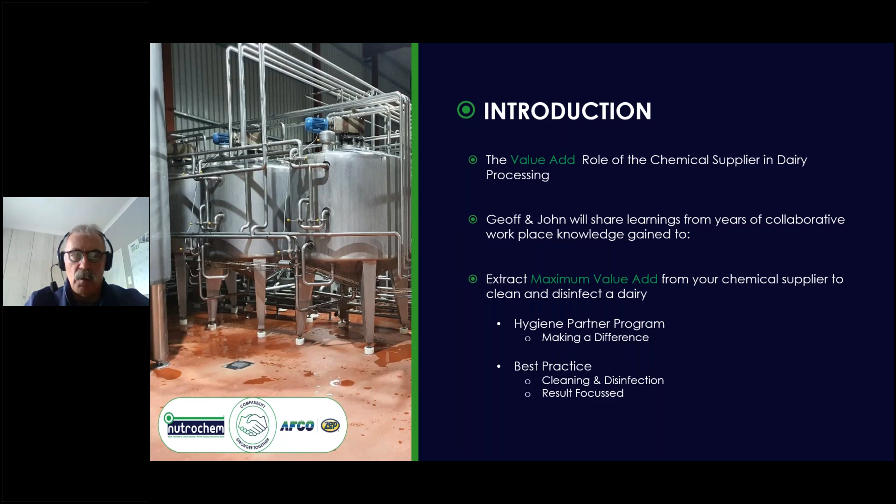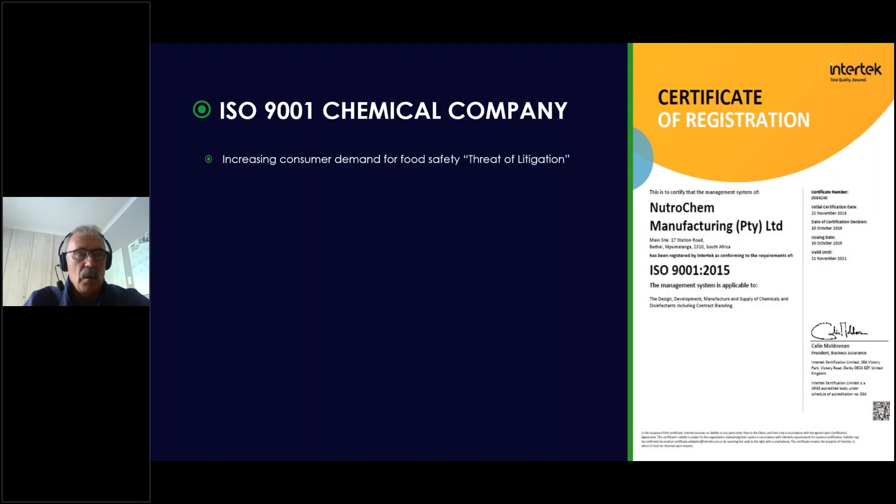Importance of being a 9001 certified manufacturer. Increasing consumer demand for food safety, threat of litigation - we've all been subjected to the listeria outbreak that existed and all the costs related to that many of our large manufacturers incurred. Food processing facilities require the peace of mind that the risk related to food processing is managed well by your supplier. Your hygiene product should be certified and approved.

Suppliers must consistently produce products that will meet customer quality and performance requirements. A QMS system that allows for traceability and accountability should there be any requirement to backtrack any particular issue that may occur within the cleaning and disinfection process.

Further, the role of the chemical supplier must be a hygiene partner that can collaborate with a customer to set global benchmarks and strive for continuous improvement. Manage product performance to achieve hygiene chemical outcomes aligned to industry-specific food safety requirements, with a continuous improvement culture and an outcome-driven focus on best practice hygiene standards, and process-ready surfaces to focus on producing safe food with a good extended shelf life and low cost to clean.

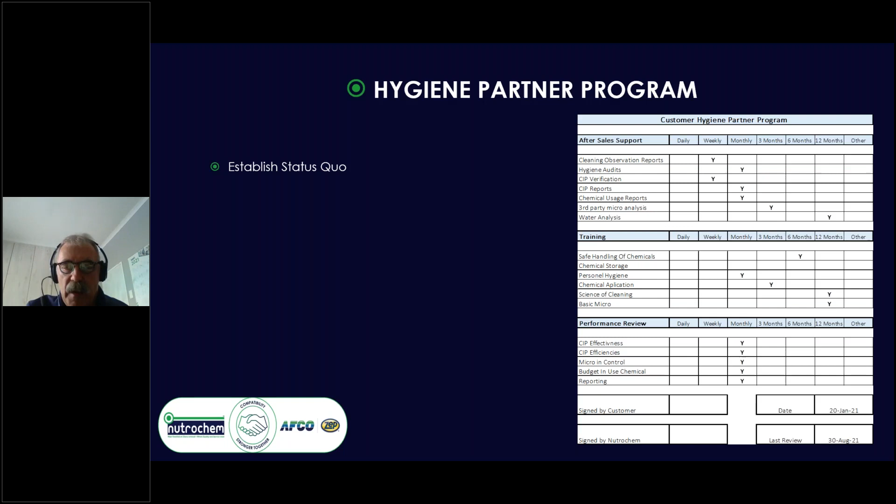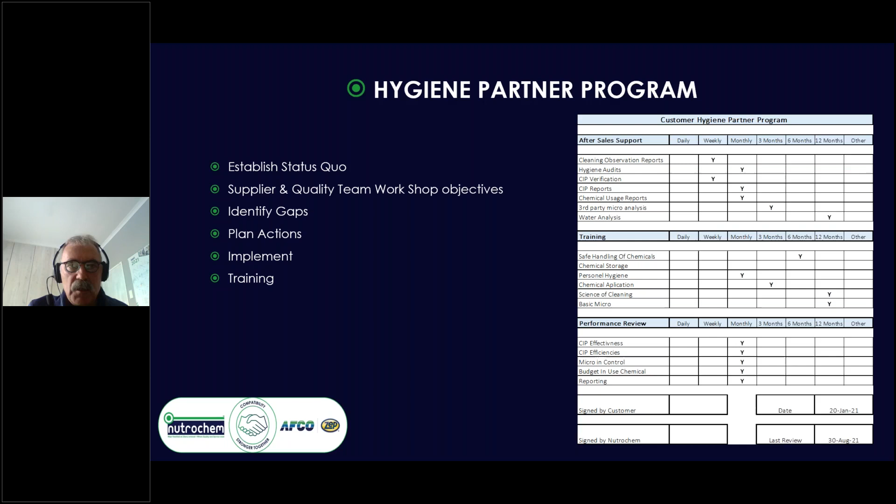Typically, when we engage with a customer, we would establish the current status quo. If you can see this document on the right-hand side, it allows us to outline all aspects of the hygiene partner relationship, set the criteria for how one wants to manage that process, establish the current status quo, identify the gaps, plan actions to close those gaps, implement the changes, train people to ensure those changes remain at the standard they should be, and then monitor and evaluate.

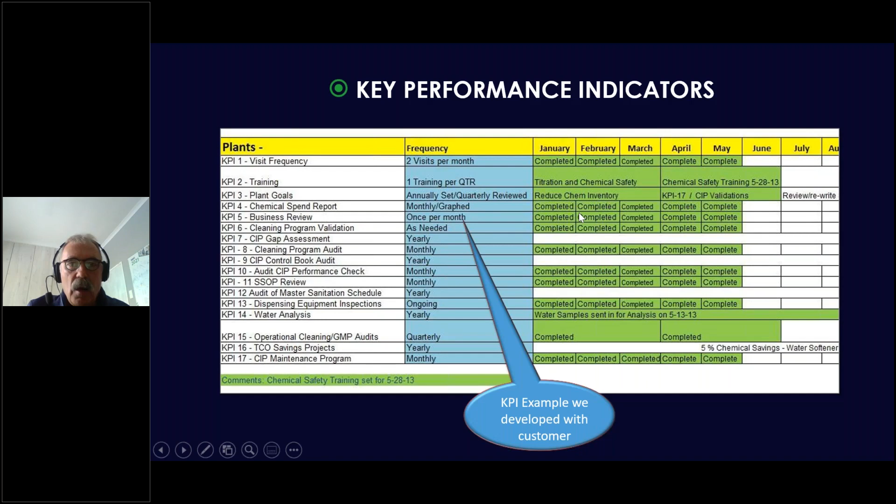Apologies, just going back - this is another document that allows for project management. It illustrates that all projects set are completed by certain due dates between the two entities, both the customer and the supplier.

Managing CIP regimes, our focus is always on an effective CIP regime that is efficient, using customized tools to monitor and evaluate CIP performance. Our in-use cost is all important. Energy and water are all important.

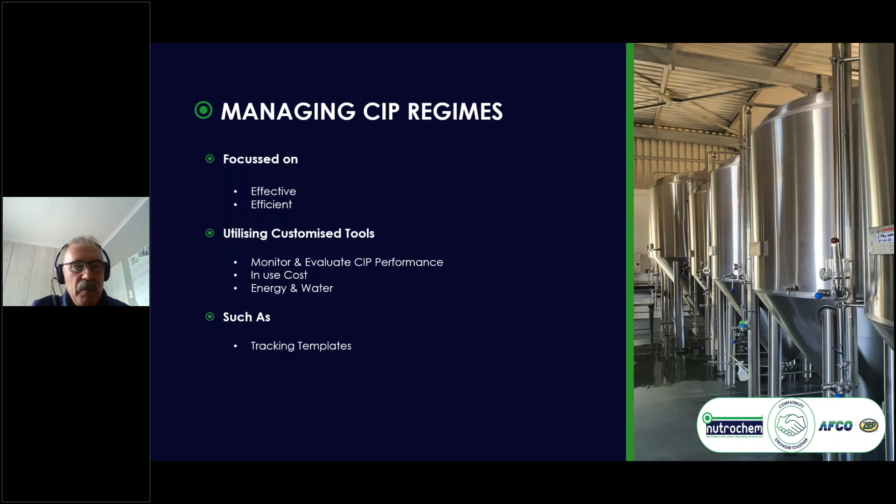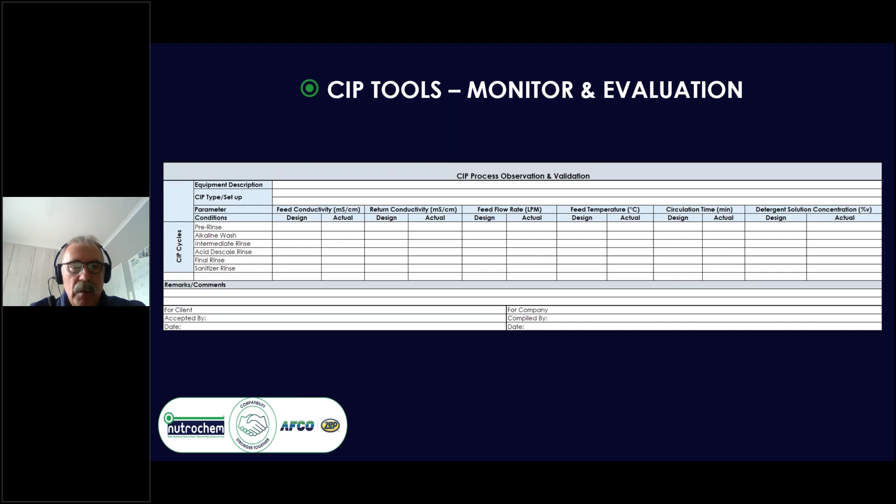Tools that we have as an example would be a tracking template, and a new technology known as verification in place, which allows one to evaluate proof of cleans. This is a document typically that we would put in place to monitor cleaning and effectiveness of the clean, along with all aspects of CIP parameters. This document can be customized depending on each entity we may be working with, to suit your needs and achieve a common goal as an outcome.

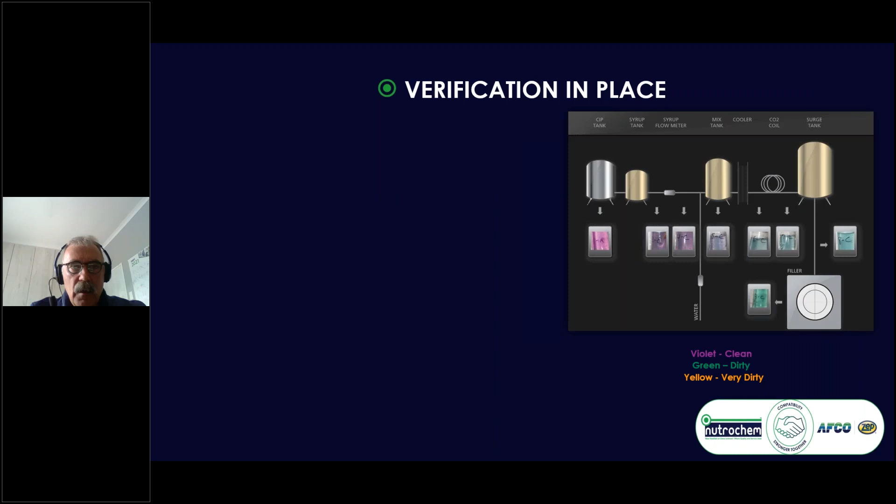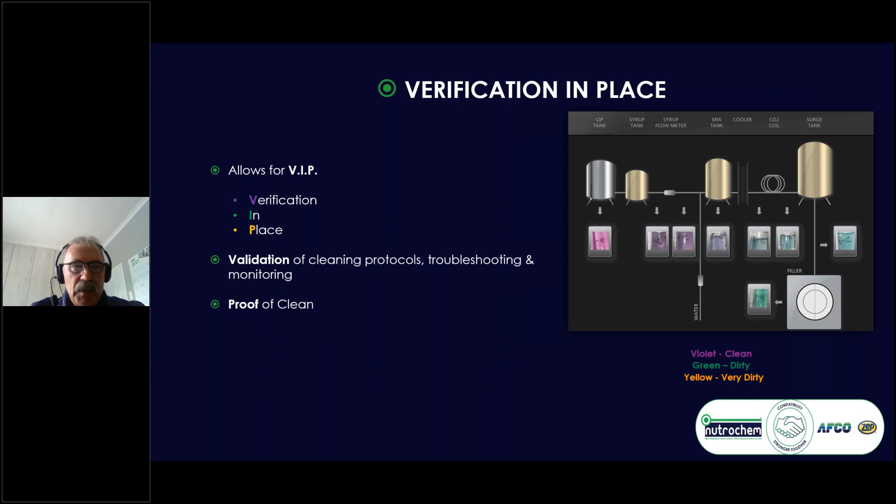Another tool that we have right now is known as smart technology. It allows for verification in place, which is a validation of cleaning protocols and troubleshooting monitoring, and it's designed to give you proof of clean. John, my colleague, will explain a little bit more about this in detail as he presents the technical side of the customer hygiene program.

Further to that, the role of the chemical supplier should have technology available that is aligned to global trends, reduces demand on energy and water, allows for optimized CIPs, and gives you access to an international knowledge pool, with application methodology that applies best to your needs. It should have an environmentally conscious focus, lead the way in sustainable raw material selection, and product raw material exclusions such as formaldehyde and NP9s for bioaccumulation potential risks.

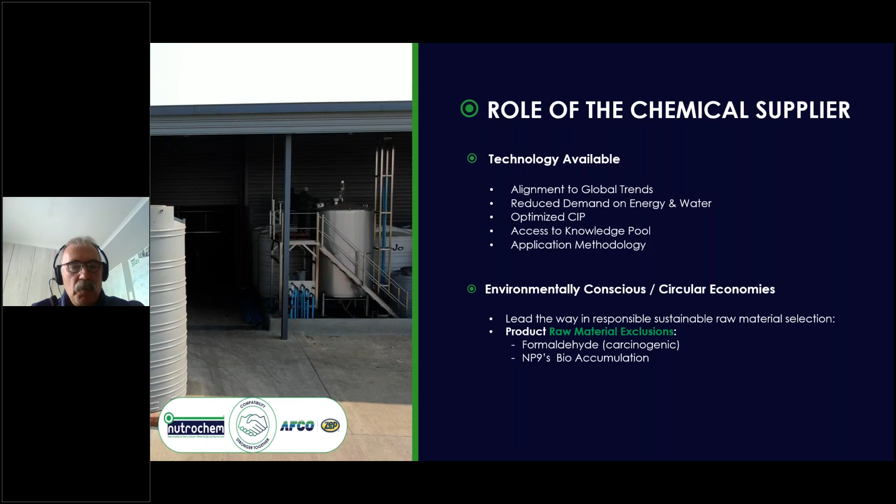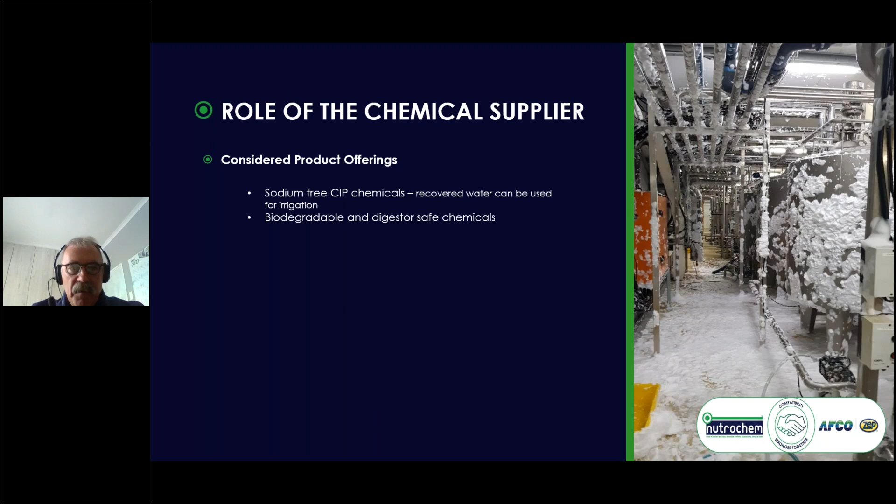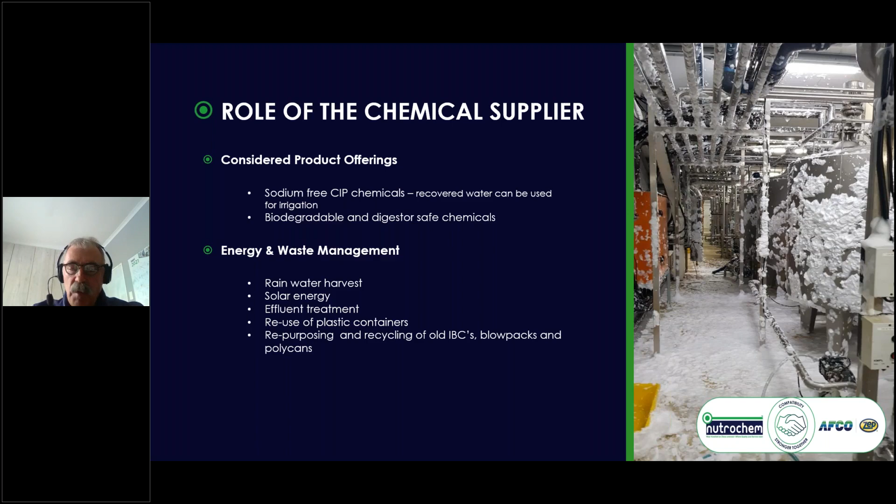In addition, considered product offerings should be sodium-free, aligned for recovered water that could be used for irrigation of farmlands, etc. Biodegradable and digester-safe chemicals, energy and waste management, potentially harvesting rainwater for the production of chemicals, solar energy to reduce your footprint, effluent treatment, reuse of plastic containers where possible, and repurposing and recycling of old IBCs, blowpacks, and polycans, things of packaging of that nature.

At this point in time, I'm going to be handing over to my colleague all the way from Australia. John, welcome. Thank you very much, Jeff. Good morning everybody, my name is John Cornford, and I'll talk about some of the technical aspects of cleaning and disinfection.

I'd like to start this off by talking about some definitions. I'll just wait while the link from Australia to South Africa works. Just hold on a moment. I'm having a small problem with the slide management. Excuse me for one moment while I bring this back under control.

If we start off by talking about some definitions, we'll start with definitions about cleaning. Cleaning is the complete removal of residues and soil from surfaces using water, detergent, or enzymatic products, leaving them visually clean so that subsequent disinfection treatment can be effective. You cannot disinfect dirty surfaces. Physically clean means visually clean to a satisfactory standard. Dry surfaces and strong light sources make a big difference to seeing what is visually clean. I use 150 watt LED panels instead of torches to look at tanks, and the results are startling as many otherwise unseen imperfections become visible.

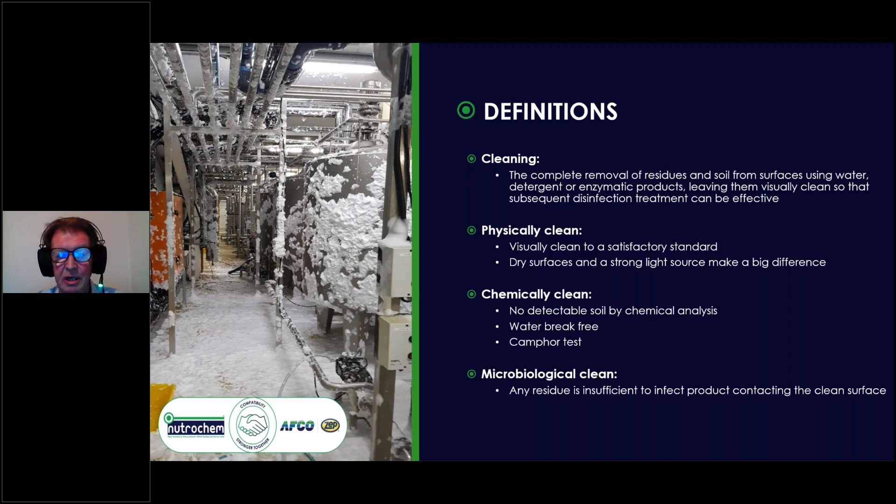Chemically clean can be defined in various ways: that there's no detectable soil by chemical analysis, that there's a water break-free surface, meaning water does not bead on the surface, indicating the presence of residues, or something called the camphor test. The camphor test is a very sensitive test for oily residues, particularly useful when validating the cleanliness of newly installed tanks. The last one is microbiologically clean, meaning any residues are insufficient to infect product contacting the clean surface. If we move on to a second set of definitions related to disinfection.

Disinfectant is a product used for its ability to kill specific microorganisms, meeting specific standards of log reduction under specific conditions. Chemical products falling into this category are highly regulated and covered by a range of standards, including testing under soiled and unsoiled conditions, testing in hard and soft water, etc. Disinfectants are typically used in a two-step process of cleaning followed by disinfection.

They're clearly defined and codified around the world and recognized as high-level activity materials. The South African standard for disinfection, SANS 54885, is aligned to the European standard, EN 13697, so there's an alignment of standards. South Africa further classifies disinfectants according to meeting various standards for killing different microorganisms in different physiological states.

The second definition is about sanitizer. Sanitizer is a term associated with disinfection, but it's got vastly different meanings around the world. In South Africa, I understand it's generally used to describe personal hygiene products such as hand sanitizers. In the US, the EPA defines sanitizers as products which must kill 99.9% of bacteria, or a log-3 kill, on surfaces within 2 hours of exposure, but not viruses. Clearly, such a product is not very useful to us for disinfecting food contact surfaces.

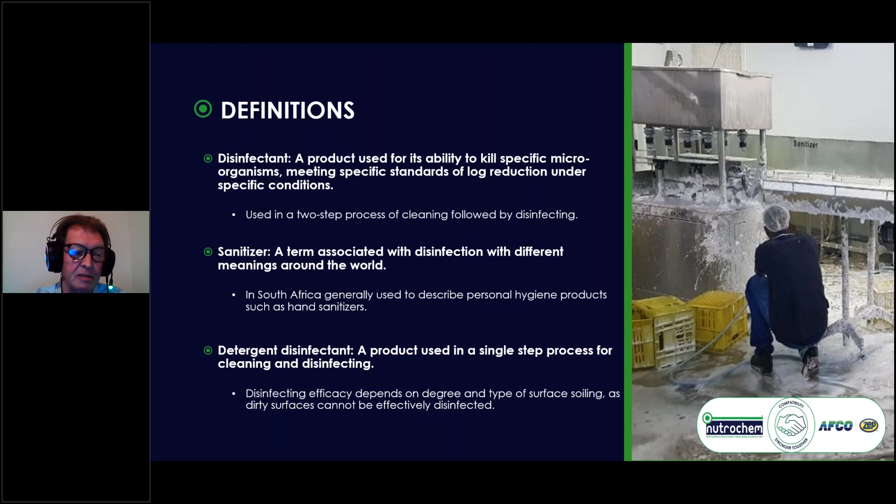If we move on to definitions about some applications, and talk about firstly CIP. So CIP means cleaning in place, and it's cleaning and disinfecting processing plant interior surfaces without the need to dismantle, including vessels and pipe work and valves and heat exchangers and centrifuges and filler interiors and so on. COP is cleaning out of place, which traditionally involves stripping plant to its component pieces and placing them in a tank of detergent, which is circulated to provide mechanical action. This has been largely superseded by CIP.

Disinfectant, soak, and storage tanks still fit into this category, and they're used to disinfect parts after cleaning and store them in process-ready condition until they're next required, and that's still quite common.

OPC means open plant cleaning, and it's a process for cleaning and disinfecting exterior surfaces by spray, foam, or manual cleaning. Sometimes the application is done by an operator and sometimes by fixed automatic systems. EFC, the last one, is exterior filler cleaning, and it's a subset of OPC, usually specific to rotary fillers, and it generally involves a fixed jetting system and an automated cleaning program.

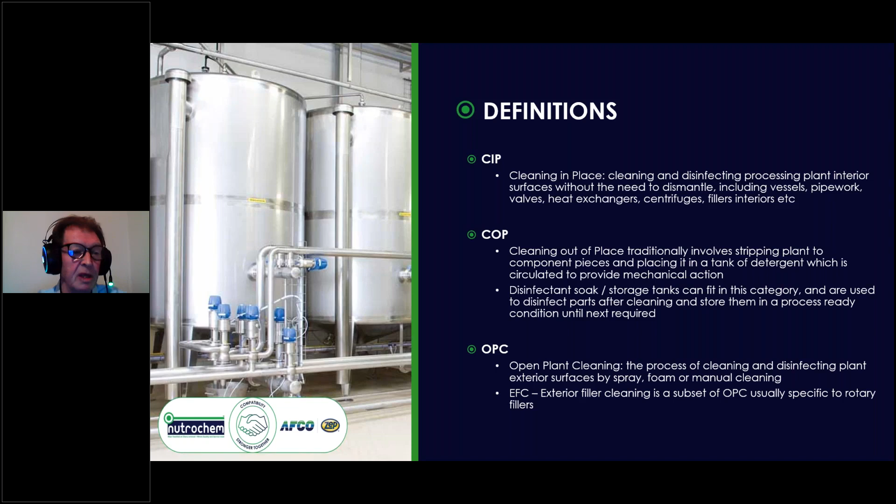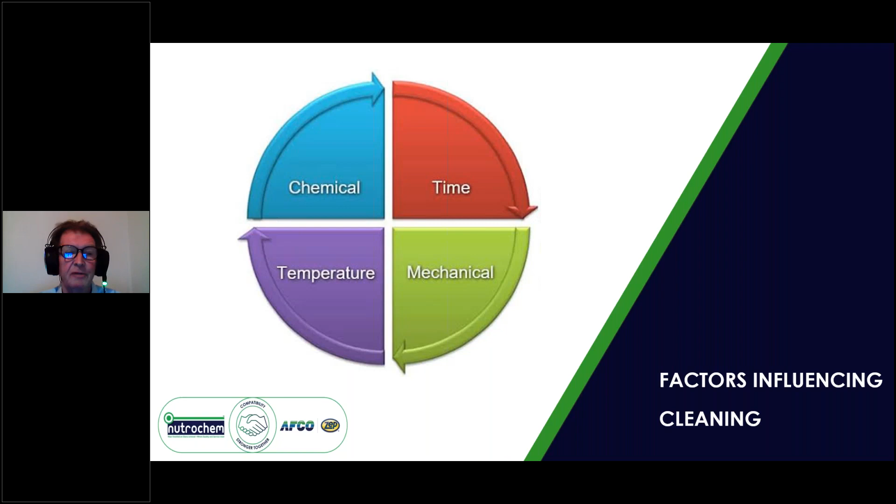We talk for a moment about factors influencing cleaning, and the graphic here shows you something that's called Sinner's circle, and it shows that the four key factors for cleaning are chemical, time, mechanical action, and temperature.

Effective cleaning relies on three energy sources: mechanical energy, chemical energy, and thermal energy, and applying them for a period of time. If we think about mechanical energy being applied in various different ways: the scrubbing action of a brush or cleaning pad in manual cleaning, or the scrubbing action of high velocity turbulent flow conditions in a CIP pipe cleaning, or the scrubbing action of falling liquid films in a low pressure vessel cleaning scenario.

Chemical energy for cleaning takes many forms depending on the soil matrix and the chemistry applied, and the water condition as well. Amongst others, we consider simple dissolution, where an acidic detergent would dissolve a scale, for instance, saponification of fats and oils, where strongly alkaline products act on something like milk soils, surface tension reduction by wetting agents, allowing cleaning agents to penetrate soils, to emulsify oily soils and to reduce the foaming tendency of foam generating soils, things like proteins. Thermal energy is pretty straightforward.

The rule of thumb is that chemical reaction rates double for every 10 degree C rise in temperature. However, thermal energy usage and cost can contribute significantly to the overall cost of cleaning, so people are generally tending to reduce temperature, not increase it.

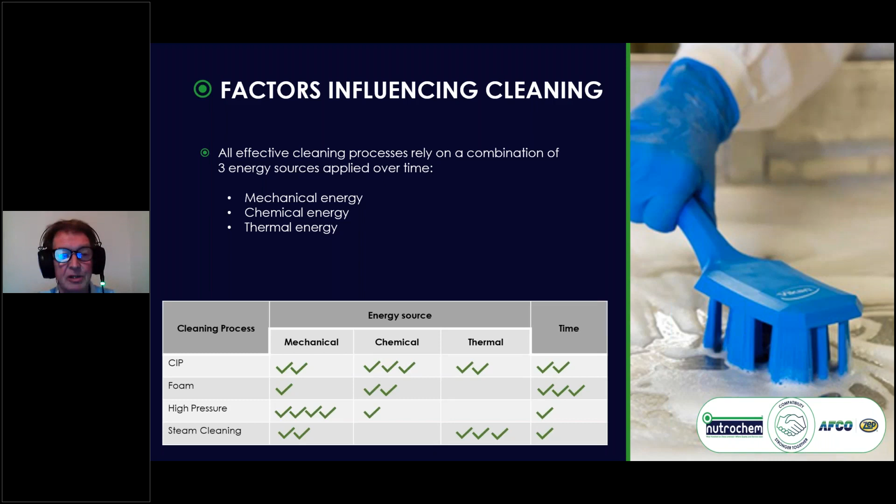Different applications rely on different balances of these energies and on applying them for different times. If you look at the graphic, it shows on the left-hand side various different processes, then something about the energy sources, and with some ticks something about the amount applied and the time they're applied for.

If we talk for a moment about chemical supplier instructions, there are many instructions required of suppliers: product composition and efficacy information, safe storage and usage of products information.

The collaboration and development of standard operating procedures is one of the most important things. All cleaning and disinfecting processes must be covered by detailed SOPs, standard operating procedures, and they should be developed by the user and the supplier, because the supplier knows about the chemistry he wants to apply and the best conditions for doing it.

These should cover the object being cleaned, the frequency of cleaning, and the maximum period from empty to clean. You don't want tanks to sit empty and allow soils to dry out - they become much more difficult to clean. So it needs to be specified.

The frequency of disinfection, including during periods of plant inactivity. So if you clean and disinfect a tank and it's not used for 72 hours, should you be disinfecting it again before using it? There should be a standard.

Requirements in preparation for cleaning, detailed program cleaning, including for each step the temperatures, the times, the chemical products and concentrations, including sampling and testing regimes, flow rates if applicable, pressures if applicable, and rinse step terminators, which could be something like pH or colorimetric tests.

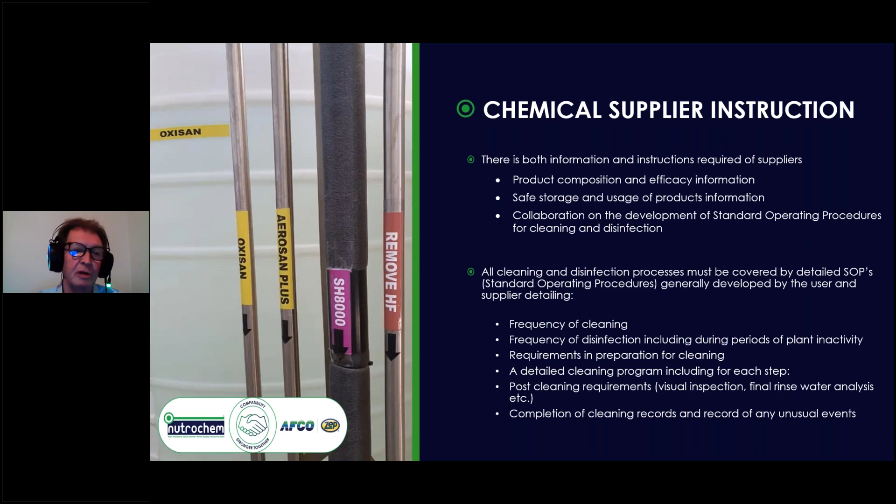Then post-cleaning requirements - it might be about visual inspection, final rinse water analysis, whatever it might be, but there are things that need to be done after the cleaning to validate it. And lastly, the completion of cleaning records and the logging of any unusual events.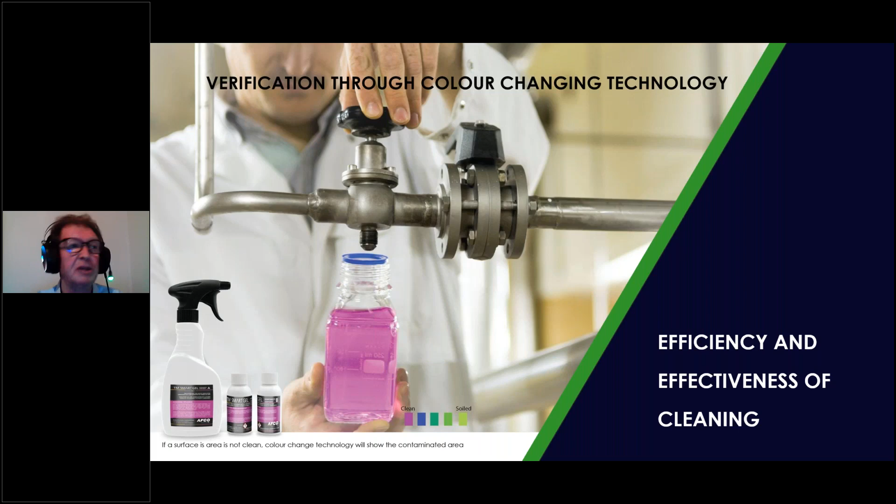We'll talk for a minute about CIP management and efficiency and effectiveness of cleaning. CIP can be classified as effective and efficient. Effective means that after CIP operations, the plant is clean, it meets the required microbiological standards, and it's process ready. Efficient means that the plant is clean and process ready at a reasonable cost, including utilities such as water, heat energy, effluent chemistry, and production downtime.

The key factors that impact on effective CIP are the correct programs, usually combining pre-rinse, detergent wash, post-rinse, disinfection, and a final rinse step if applicable. The correct flow rates and pressures for the plant items being cleaned, necessary to create the correct amount of mechanical action - this is absolutely critical and is often overlooked and missed.

The flow rates for pipes are relative to the pipe diameter, creating flow velocities in excess of 1.5 meters per second, probably with a maximum of maybe 3. For vessels with low pressure spray devices like spray balls, the flow rates are relative to the vessel's circumference and to some extent its height and the soil load.

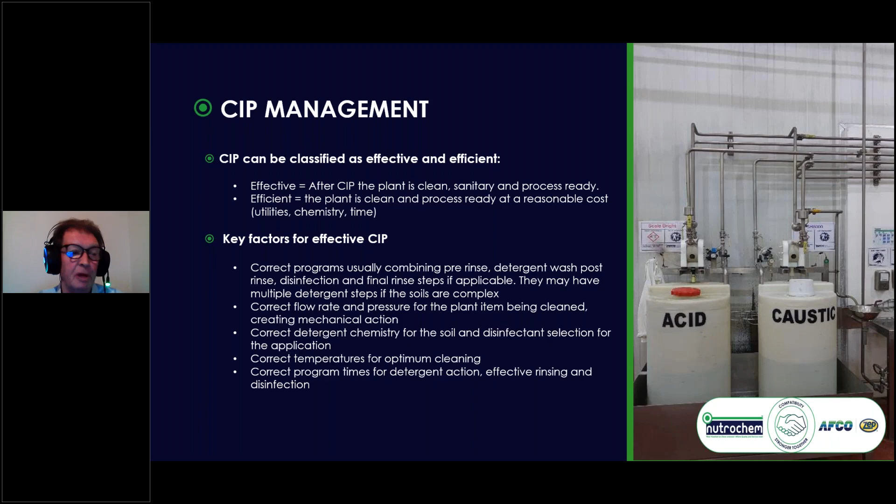The correct detergent chemistry is important, and the correct selection of disinfectant for the application. The correct temperature for optimum cleaning, and the correct program times for detergent action, effective rinsing and disinfection. So those are the things for effective CIP.

If we talk about efficient CIP for a moment, this is about minimizing the losses of chemistry, water, and thermal energy. In a typical world, minimizing these losses reduces CIP time, and so it also reduces production downtime. Assuming that hot CIP temperatures have been optimized, most losses occur during CIP phase changes.

This is when you're changing, say, from rinse water to detergent or detergent back to rinse water, etc. Creating specific steps in the CIP program to manage these interfaces is critical. The objective is to create program steps that minimize the opportunity for different phases to mix by managing the interfaces into pipes where they're confined, not in vessels. These steps are employed each time there's a phase change, and they're special to each CIP circuit, each CIP object.

The efficiency is measured by comparing the detergent lost during the CIP process to the detergent quantity in the CIP circuit being cleaned, because detergent's easy to measure. So we find an easy way to do it.

Efficient CIP would be characterized by line CIP losses of, say, 6 to 10% of circuit volume. So if you had a CIP circuit where the volume was 1,000 liters, that'd be a medium-sized tank with its pipe work. If you were cleaning this 1,000-liter circuit at 2%, you would expect on a line to use 1.2 to 2 liters of concentrate detergent.

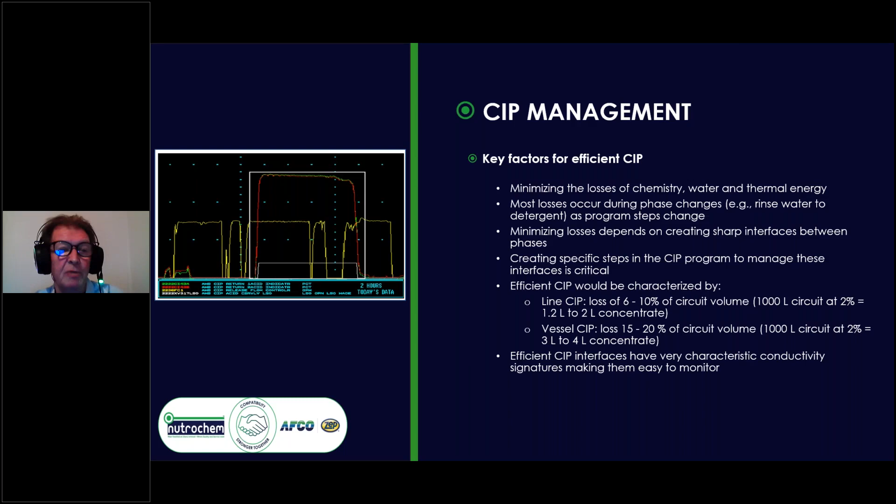Let's move on and talk about what happens when CIP all goes wrong. For ineffective CIP, so this is, I've done the CIP but things are still dirty, what are the actions? Check the CIP program operation with the original protocol. Has something changed? Did somebody bypass a step? What's going on?

Need to check that the operation of the CIP object for things like blockages, leaks, and malfunctions. Are the spray balls still in place? Are the spray balls blocked? Whatever it might be, are the valves opening correctly?

Need to check for changes in manufacturing protocol impacting on soils. Has somebody changed the way that processing is done, or the type of product that maybe flows down the pipes or flows through the tanks? It's changed, it's making everything difficult.

You need to check the times, temperatures, flow rates, concentrations, and so on. Check the instrumentation. With the best will in the world, instrumentation is calibrated regularly, but you very often see problems with instrumentation that mean the feedback values to CIP are incorrect and the CIP performs incorrectly. When you've done all of that, you usually have enough data to be able to resolve the issue.

The second one is about inefficient CIP actions. So if the CIP is much too expensive, what's going on? Again, firstly, you check the program operation with the original protocol, check the interface management steps, and any changes to the object configuration. The interface management steps are very critical to keeping the interfaces in pipes and not in tanks. If the pipe work has changed, the whole thing will be wrong.

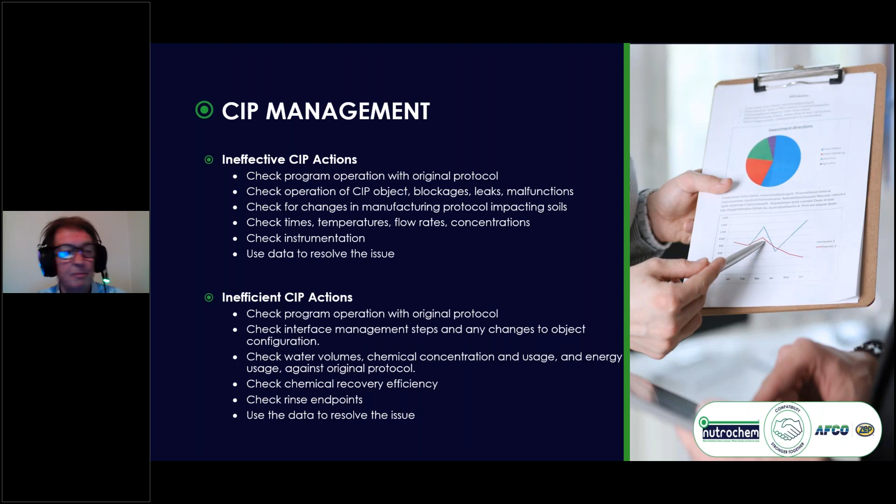Check water volumes, chemical concentration and usage, energy usage against the original protocol. Check the chemical recovery efficiency. Remember the 6% for pipes and the 15% odd for vessels. Check the rinse endpoints and use the data to resolve the issue.

If we talk for a moment about cleaning and disinfection validation, we talk about it first for CIP. The traditional validation methods are systems integrated into the CIP control system, where it's recording and comparing some key CIP parameters with a benchmark. The key parameters would usually be conductivity, flow rate, and temperature. If the values drift far enough away from the benchmark, it'll throw an alarm up and maybe stop the process or wait for somebody to take some action.

The second one is visual inspection. This is a little problematic as it breaks the post-disinfection security, but it's satisfactory if it's performed before the final disinfection process. After all, the tank should be clean, or the vessel should be clean, or the lines should be clean before disinfection.

Microbiological swabbing and ATP testing, and sampling of final rinsings from CIP cleans for microbiological testing if there's a final rinse. There are new colorimetric detergent technologies based on oxidation reduction chemistry with a color change from soil to clean during CIP, and these are becoming very useful.

When we talk about exterior cleaning and validation, it's traditional all the way. So traditional visual inspection techniques with strong light sources, traditional swabbing techniques, but now the use of dye technologies to clarify shadow areas where automatic cleaning systems aren't reaching, and the general cleanliness of automatically cleaned items on things like fillers.

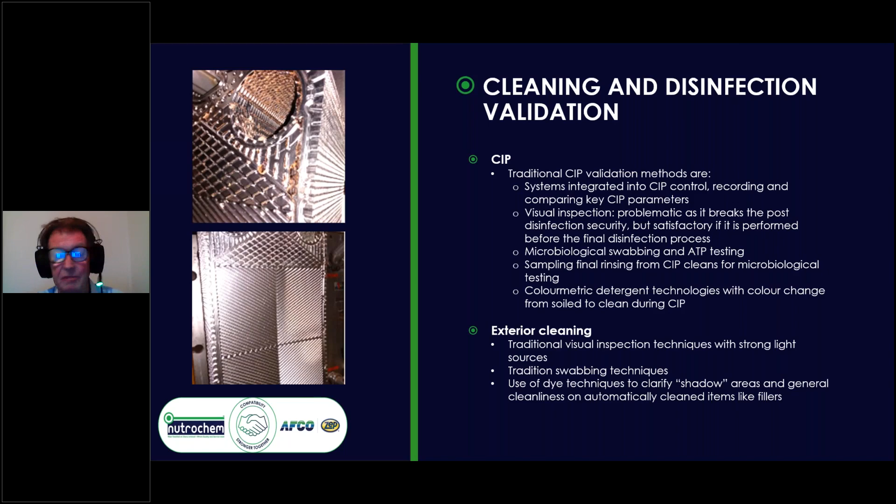Let's talk for a moment about the verification of rinse water usage. Every rinsing step must have a defined terminator that's not based on time. Time doesn't rinse anything. It may be applied for a time value or as a volume, but it should be based on a measurement critical to that process.

So rinsing occurs as pre-rinsing, which is prior to cleaning as a gross soil removal step. Post-rinsing after detergent steps to remove soil and detergent residues. And final rinsing generally after disinfection steps if it's done.

Pre-rinsing may use recovered water, and its endpoint is usually managed on time or volume, but it's based on measuring the level of soil in the outgoing pre-rinse water. You want to rinse away all the soil that you can. Good measures would be turbidity or color, or brix for sugary soils, or pH for acidic soils.

Post-rinsing is typically removing acid and alkaline detergent residues, and it's usually managed on conductivity. Conductivity is a poor indicator of concentration at low levels. It's very good at operating concentrations, but very bad for rinsing. Managing on time or volume based on pH is much more effective.

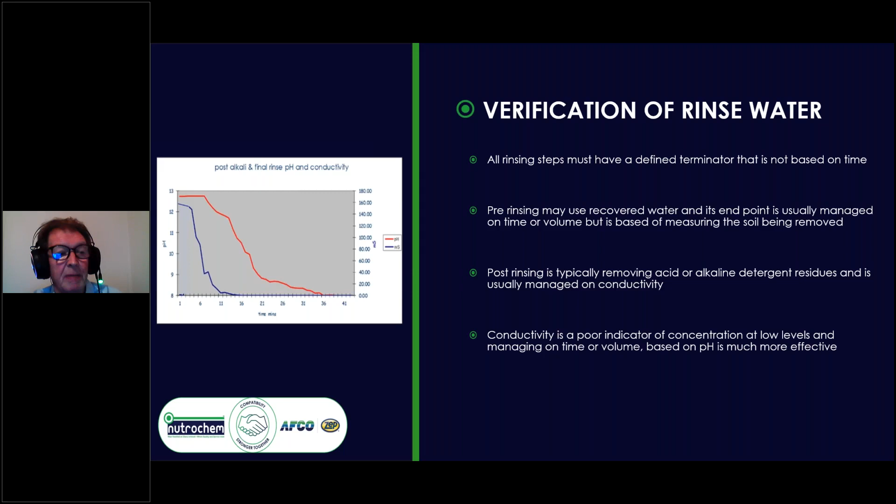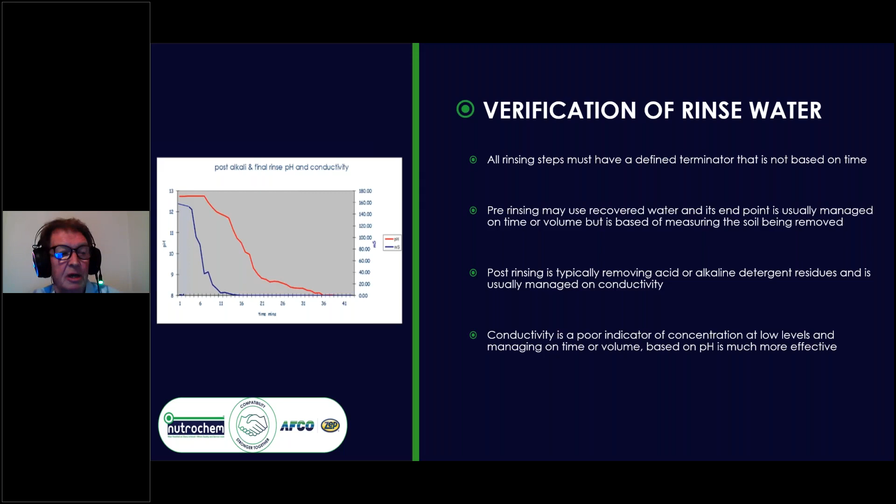Final rinsing specification is critical, as residues will contact product. Where final rinsing is required, it's often managed on conductivity, but it's better managed on pH or residual disinfectant concentration. Typically levels of less than 1% of disinfectant operating concentration are considered satisfactory.

If we move on and talk about verification of rinse water microbiology, when the pages catch up with me, here we go.

Microbiological quality of rinse water is very important. Pre-rinses are generally performed with recovered water, and if excessive volumes of recovered CIP water are brought back, the recovery rinse tank can become very infected and become an infection risk to the process. So CIP programs should be organized to recover enough water for the pre-rinsing process and no more.

Post-detergent rinses are performed with potable water, and despite effective water treatment programs, it's not uncommon for the potable water distribution system and the CIP freshwater tanks to develop biofilms, causing a variety of infections. Regular testing and cleaning of CIP rinse recovery water tanks and CIP freshwater tanks is indicated. A frequency of every 6 months would not be unusual.

In a situation where potable water rinsing occurs after a disinfecting step, collecting a sample of the rinse water at the end of the rinsing process and evaluating it microbiologically will provide a powerful indication of the plant item hygiene level after CIP. A blank collected from the CIP fresh water tank at the same time is indicated, to make sure that you're not disinfecting with poor microbiology water.

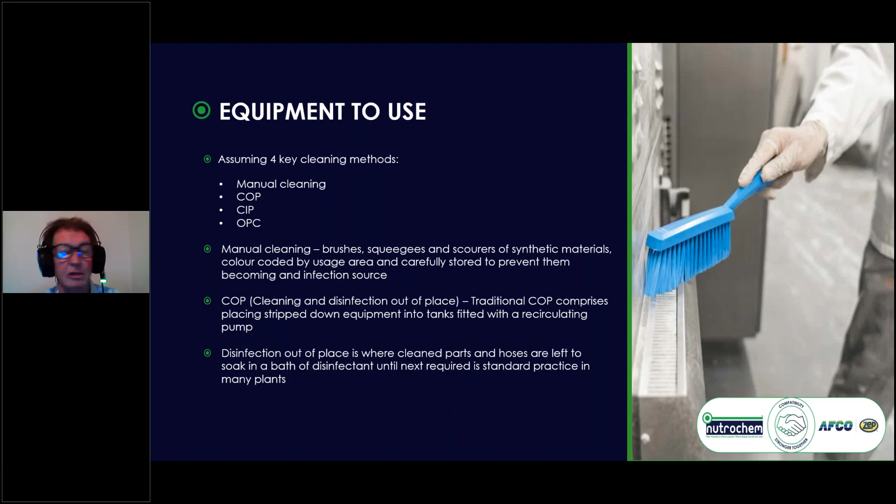If we move and think about CIP and OPC, for CIP there are two traditional equipment styles, single-use CIP and recovery CIP. Assuming the correct parameters of flow, pressure, temperature, chemical concentration, and time, both will clean effectively. Both have advantages: a single-use system has low capital costs, as there are no recovery tanks and the associated pipework, valves and instrumentation program that goes with those recovery tanks.

They have a much smaller footprint, again, because they don't have any recovery tanks. They use fresh chemical for each clean, which is advantageous in some high-risk scenarios. The downsides of single use are firstly the operating costs, because there's no recovery of anything - water, energy, chemical, whatever. And secondly, program times are longer.

Recovery systems have a high capital cost and require more space because of their recovery tanks, but the running costs are far lower. And as they recover water, chemistry and thermal energy, program times are shorter as well, as the chemistry and temperature are ready to run.

Perhaps the best systems are the hybrid systems that recover and store water, chemistry and thermal energy for reuse, but only take enough solution into the local circuit to clean the plant item. Alternatively, they can make up fresh solutions for critical tanks.

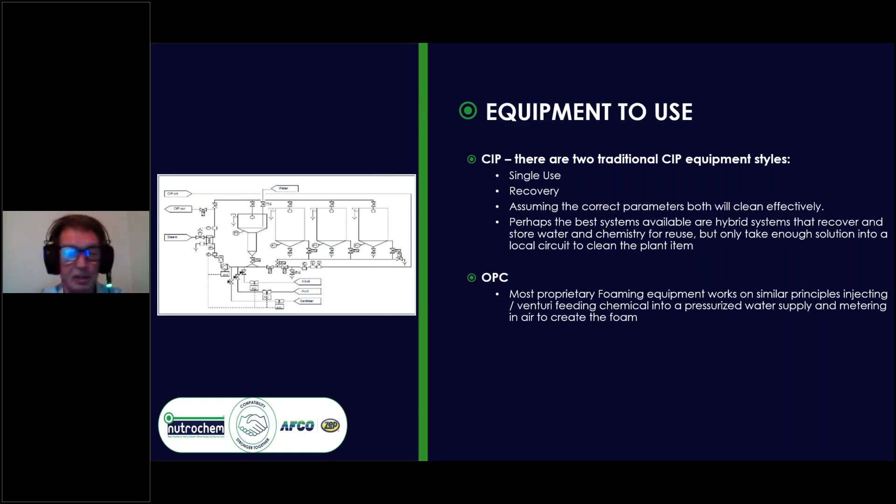If we just talk about OPC briefly, normally these are fairly simple Venturi feed units. We move on and talk about color coding, and we'll talk about color coding of what we refer to as utensils - so this is brushes and so on.

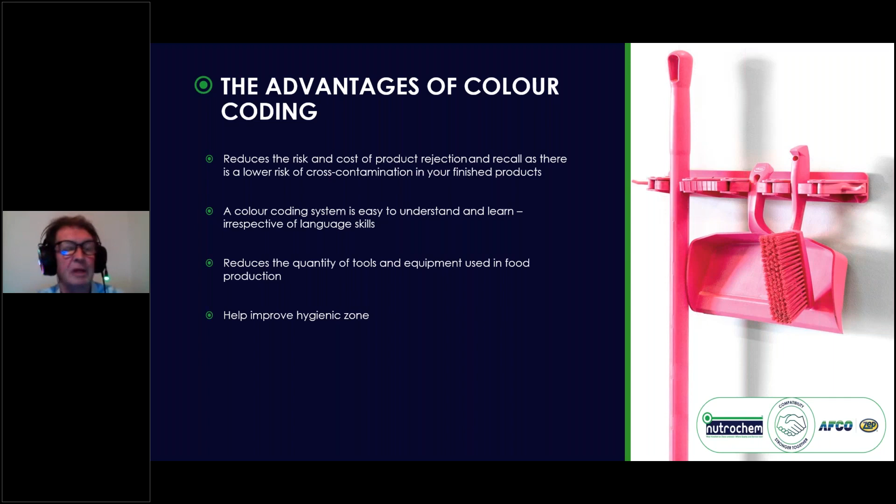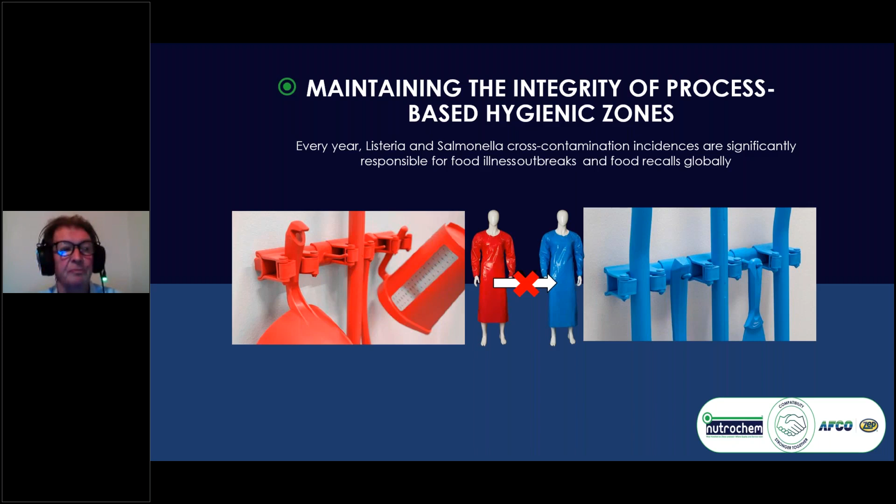If we just talk about maintaining the integrity of process-based hygiene zones - every year Listeria and Salmonella cross-contamination incidents are significantly responsible for food illness outbreaks and food recalls globally. Color coding of utensils specific to zones and contamination risk can reduce operator error in utensil selection.

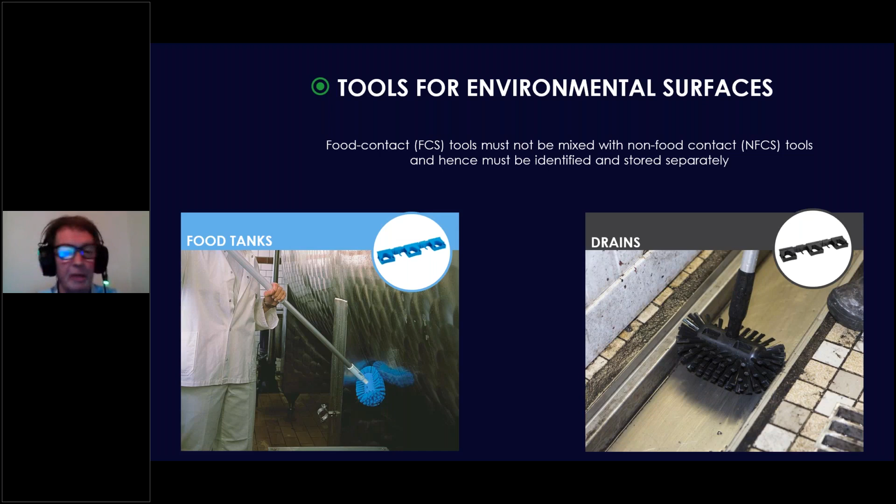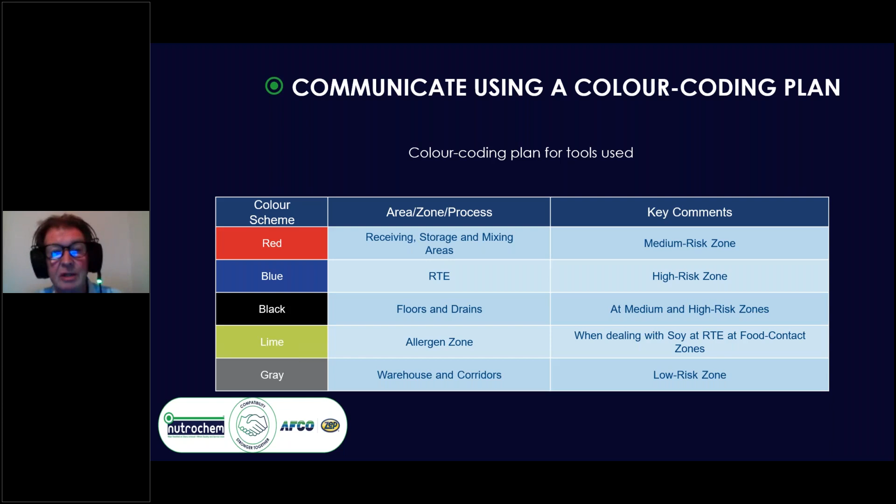Here's a graphic that talks a little bit about cleaning drains and cleaning outside of processing tanks, and how they have to be separate - one is black and one is blue. You need to communicate using a color coding plan that talks about what color is used for which process, with some comments about it.

And then you need to communicate the plan in a very simple way.

Lastly, we'll just talk for a moment about color coding chemicals. Color coding for different chemical types is important, as the product names may not have any relevance to the product chemistry, and the detailed information on the label is rarely read by operators. So if the color coding scheme is trained, it provides a quick visual indication of the type of product and an indication of the hazardous nature of the product, if it is.

The most hazardous nature of the product will dictate the color code, and the chemical storage areas should be well lit, ventilated, and clearly demarcated. All acidic products should be isolated from chlorinated products and alkaline and neutral products. An oxidizing agent should be stored away from organic materials such as wood and cardboard.

And that is the end of my presentation. I hand back to Jeff.

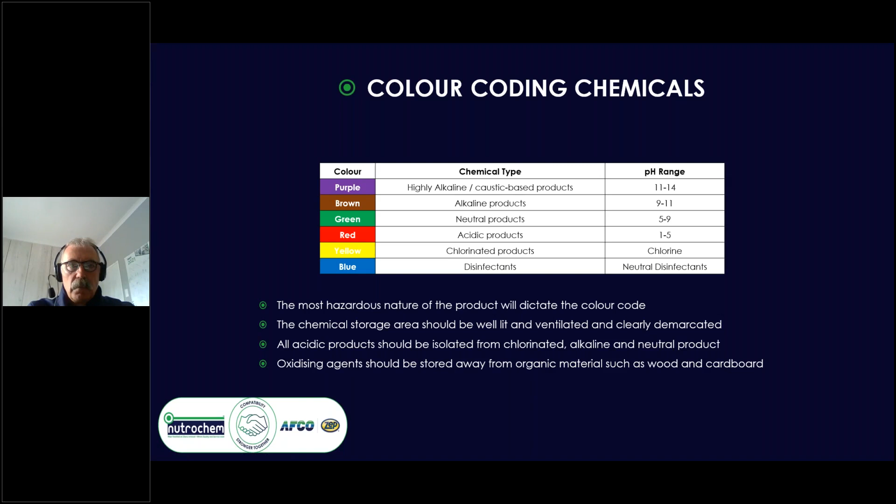In closing, all of what is available as a supplier to a particular customer is very much holistically encompassing. And without committed people, both from the supplier's perspective and within the client base, we've been unable to provide the best outcomes regarding CIP outcomes, cleaning, sanitation, and obviously the all-important in-cost chemical usage.

A supplier should be able to give you a 24/7 on-call troubleshooting outcome, supply product on time, and drive standards with industry application knowledge through training, good monitoring programs, and quality record keeping, with constant involvement of communication with the client, with all role players, and always keeping a health and safety consciousness awareness with regards to it.